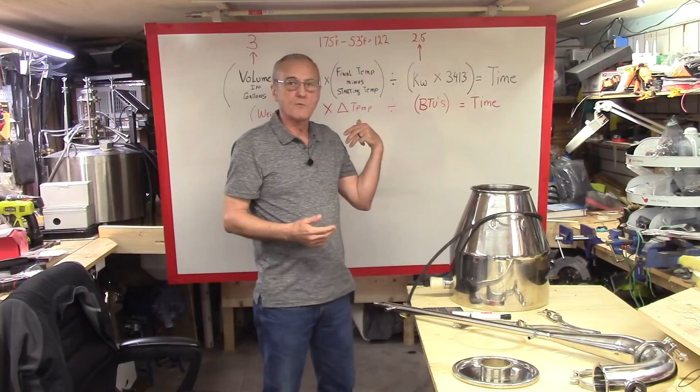So let me get this started and explain briefly. If you recall, we also did a video on how long it should take based on the element you're using. We're going to use a heater element as opposed to propane, but propane works the same way, you can use the same formula. You can recall from that video this was the formula, but don't let that dissuade you, because it's not that difficult. It's volume in gallons times 8.33, which is 8.3 pounds per gallon. And for those of you in the more intellectual world, all of this can be converted into metric, which is so much easier to use.

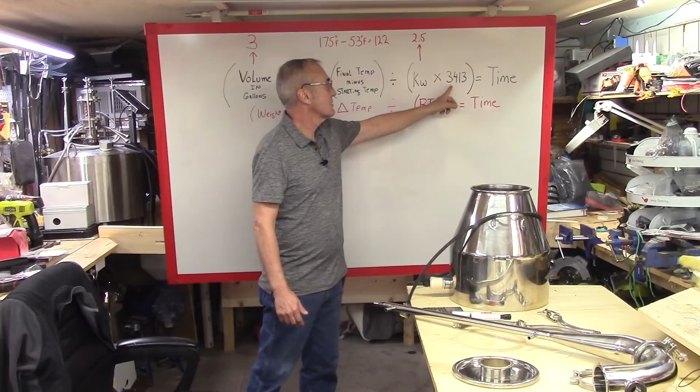Then we'll multiply that by our change in temperature, which is the final temperature minus the starting temperature. Then we'll divide that by kilowatts times 3413, which is the number of BTUs in a kilowatt. That will give us the time it should take, all things being equal, to heat that much liquid. In this case we use water as our base data point, because a gallon of water does not equal the same as a gallon of ethanol. We went through that on that video.

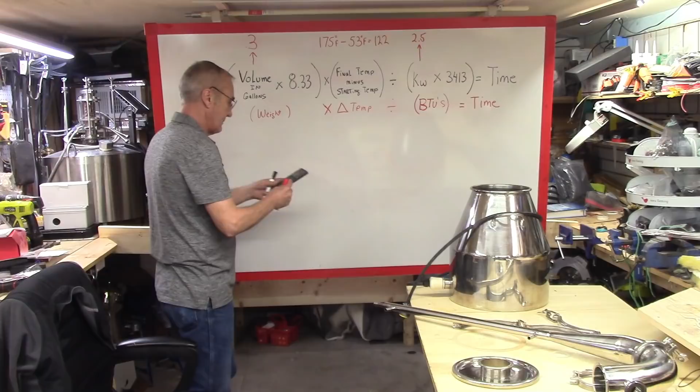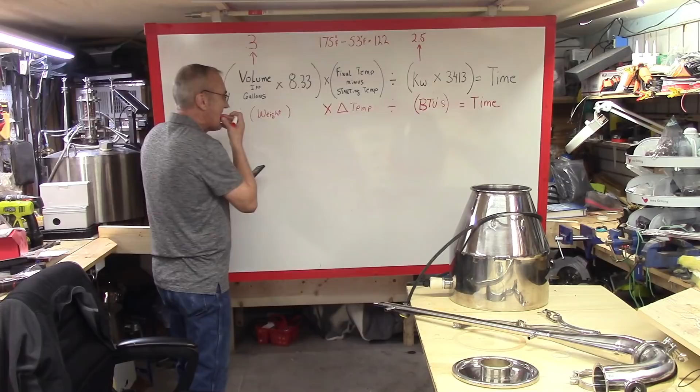I have 3 gallons. So what that really means is that I have 3 times 8.33 equals... this will equal 24.99. Can we just use 25?

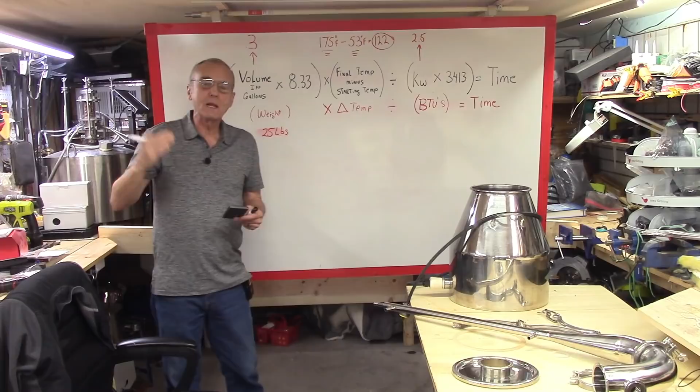25 pounds. Now our temperature change - we want to get to 175, and the water I'm using, which I've already measured and is pretty standard about this time of year, is 53 degrees Fahrenheit, coming from the plumbing. So the difference is 122 degrees. That's how many degrees I want to raise 25 pounds of water.

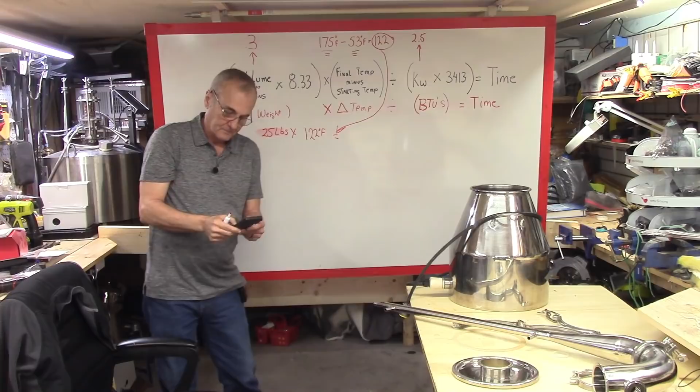So this is the figure that goes right here. 25 pounds times 122 degrees Fahrenheit equals 3048.78. And now we're going to divide that by...

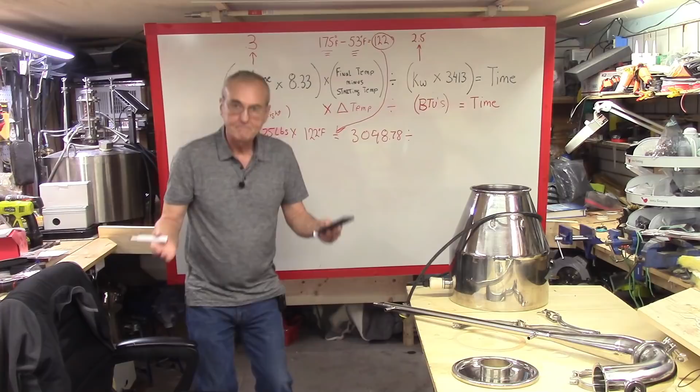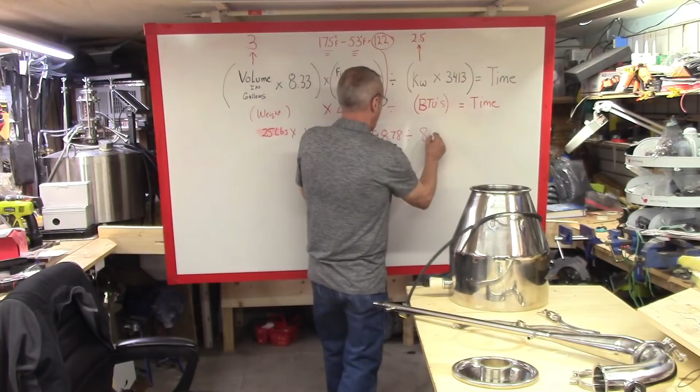See how simple this gets? We're going to divide that by kilowatts times 3413. I'm using a 2500 watt element on 240 volts. So 2.5 times 3413 equals 8532.5.

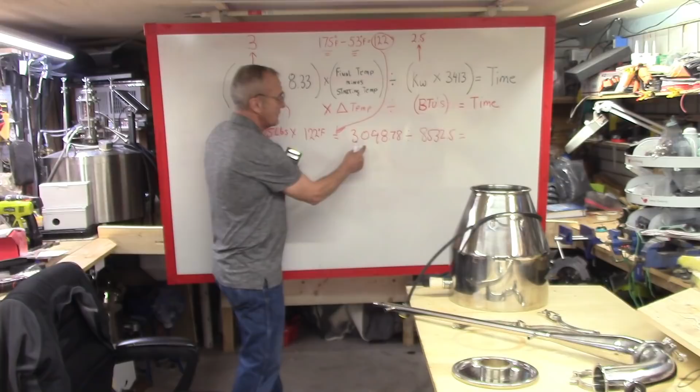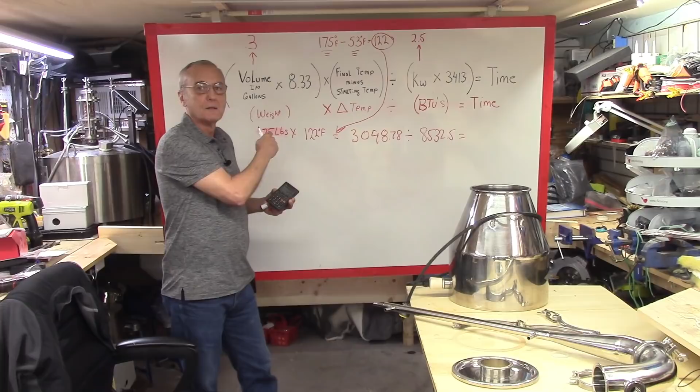So in the end, this number divided by this number should give me the time it should take, because this is BTUs per gallon per... you follow it.

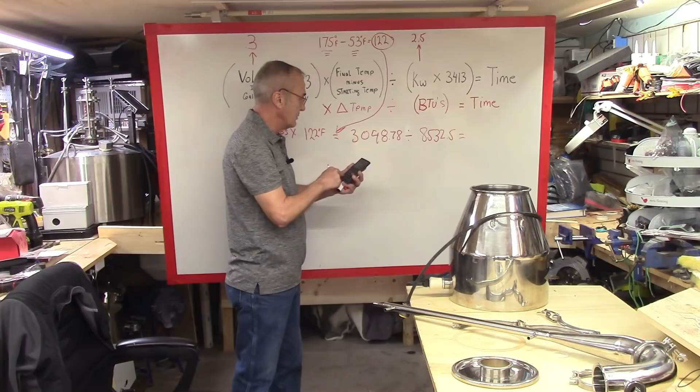3048.78 divided by 8532.5 equals 35.7 minutes. So I'm getting, well, if we round this off, 36 minutes is how long it should take a 2500 watt element to heat 3 gallons of water by 122 degrees.

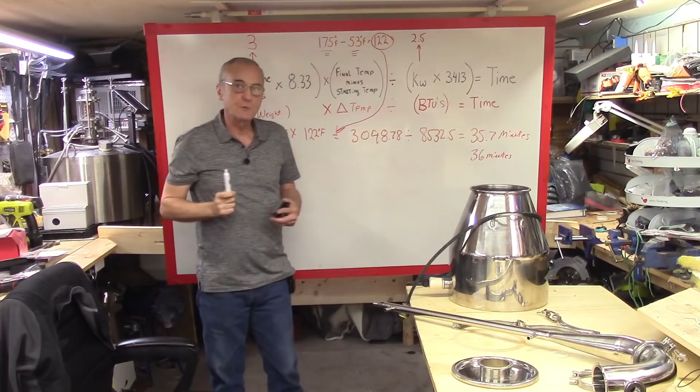Let's give that a try. Now, consider this as well, we're not going to insulate this, we're just going to run it the way it is.

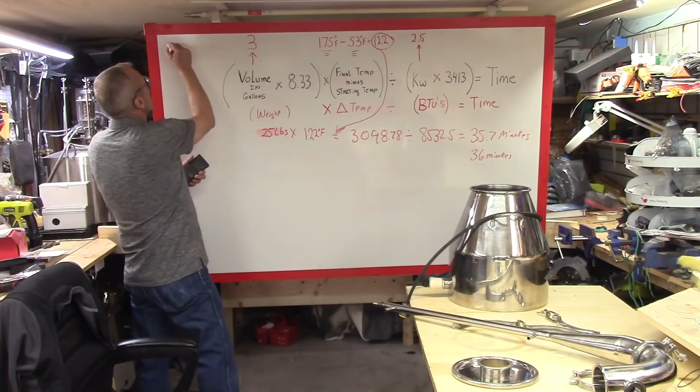Remember, by the way, your data and results may differ from mine. It is right now 71 degrees Fahrenheit inside the shop, the ambient temperature. And that makes a difference because the amount of heat loss depends on a couple of different factors.

One is the temperature inside, the coefficient or the amount of thermal energy that can be conducted by a material, the thickness of that material, and the temperature difference on the outside. That's another long formula we're not even going to concern ourselves with, but those are the three things primarily that control the amount of time it takes.

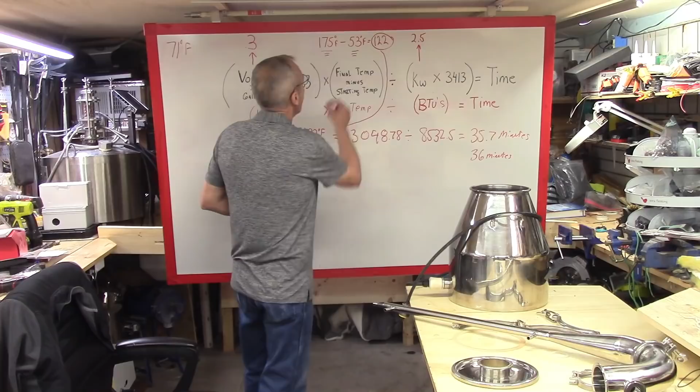We already know the temperature inside, we know how much there is in there, but what we don't know is the coefficient of this stainless steel, it's going to kind of give us an indicator when we get our results.

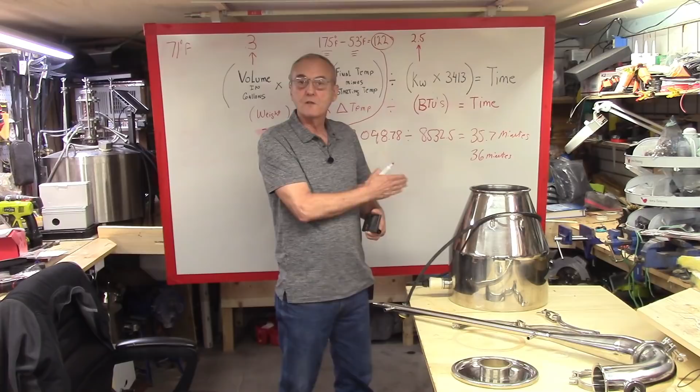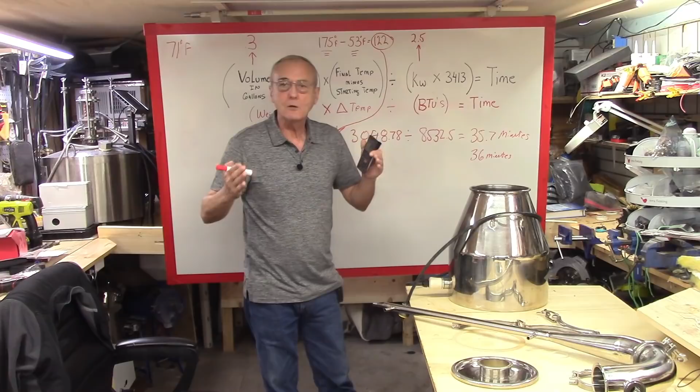But the temperature on the outside, if it's a whole lot cooler, it would probably just take longer. Or if it was a lot warmer on the outside, it would not take as long. So that is a factor to consider. Your results may be a little bit different when you run a test.

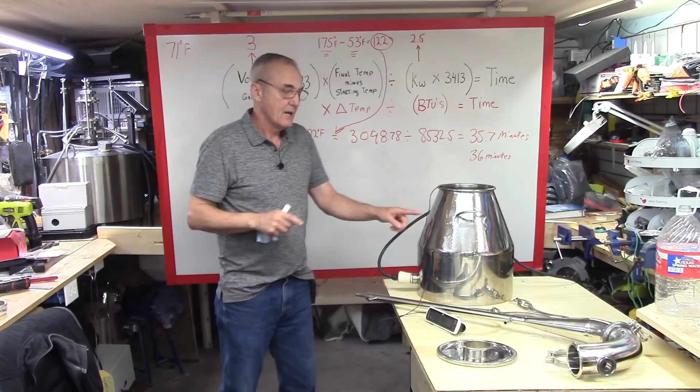Now, to be as precise as possible, I've measured, I've got it filled with 3 gallons of water, and I knew there was going to be a potential change in temperature, so I filled it up first. I'll let the stainless steel become cold, dump that, and then filled it with 3 gallons of water. And it's 59 degrees, so there's a little bit of a temperature difference between what comes out of my spigot and what's sitting in here, and of course then I've got the ambient temperature.

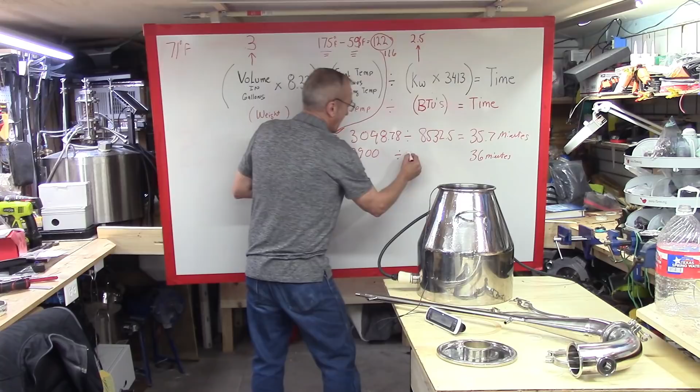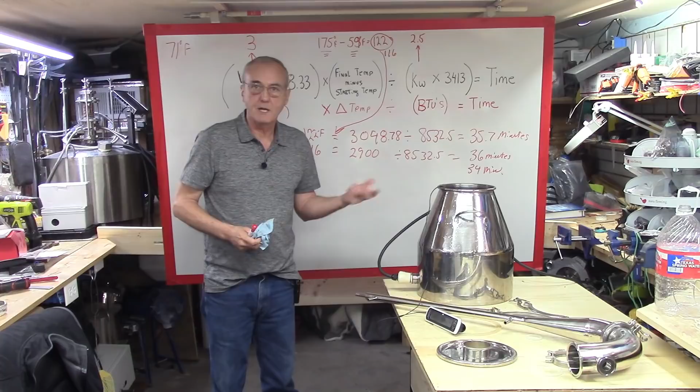So that is now the difference. This is 59, so my difference is actually 116. If I change this to 116, my result is now 2900, and if I divide that by 8532.5, that brings me down to 34 minutes. So at 34 minutes is my mark now that I'm looking for. That's how long it should take, all things being equal. Well, let's find out.

Now the first thing I've done, I've got this filled, I've got everything assembled, I've got my thermocouple in there, because I'm going to use this digital output to tell me exactly when it gets to 175.

Now, in order to do this, I'm going to use my PID in manual mode, which means I'm bypassing the P, I, and D function. I'm just going to turn this thing on 100%.

To do that, if you've got one of these Inkbirds, the Inkbird 106 VH, just push the AT run button. Hold it until that green light comes on. And once the green light comes on, push set one time, and there it shows up as 100.

But you can go up and down, and I can set the amount of power. The power output right now is 100%. So it's going to be on totally, and it won't fluctuate anything, because if it fluctuated, it wouldn't tell me what I'm looking for.

Now it's time to plug it in and get my stopwatch going. So from the time that I plug it in, I'll start the stopwatch. And we'll see just how long it takes for that to get to 175 degrees right here.

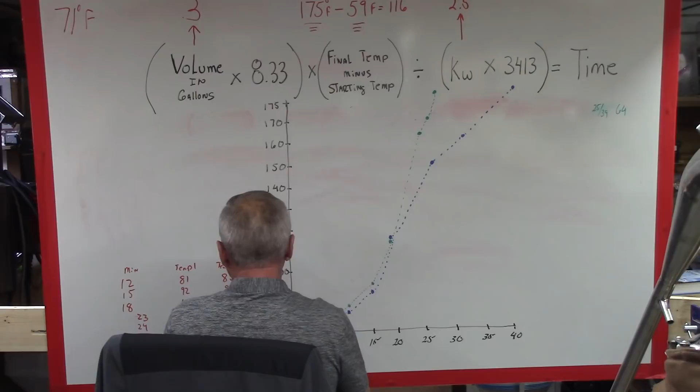And it took from 25 minutes to 31 minutes, I was at 160. Oh, there's my mark. Yep, 160. And then at 39 minutes, of course, I was at 175.

But in the insulated one, I managed to achieve a full 175 degrees in, where is that? There we go, 25 minutes total. 25 minutes from start to 175 degrees. So there's that difference between 39 and 25.

If you divide 39 into 25, it's like 64. And the remainder of that is the improvement of the efficiency.

If I think, okay, I get it. It was only supposed to take 34 minutes, but I've got this thing whittled down to 25 minutes. Maybe somebody else can help explain this, but I got to think about this one for a while. I know that by demonstration, I've made one hell of an impact on the time it takes to go from 59 degrees to 175.

Matter of fact, it's so efficient, it is below what the calculated value should have been, which kind of, I don't know, maybe someone else out there can explain exactly why that is. I know there's a difference between the liquid and the vapor. I mean, I got all of that and I'm thinking through it. But that's amazing, that's amazing.

Just remember that if you're not losing heat before you want to lose heat, well then your system runs a whole lot smoother, and controlling that volume and that energy becomes much less problematic. So it's smoother transitions, and your system and your process will run that much smoother. Not to mention the cost savings involved with putting all that energy in there.